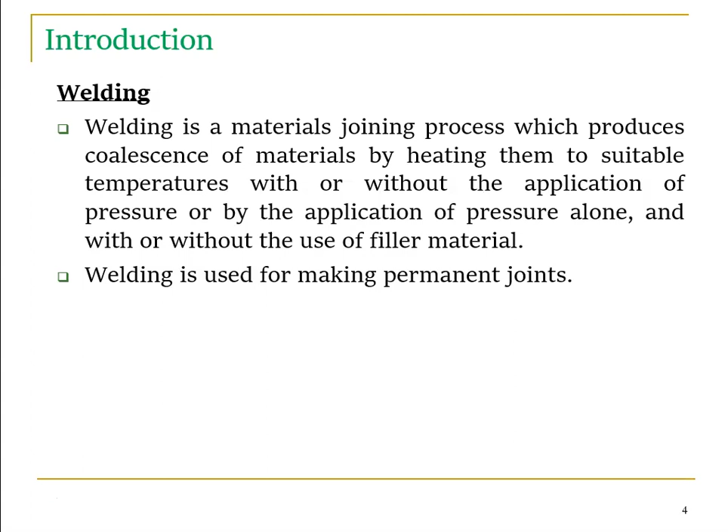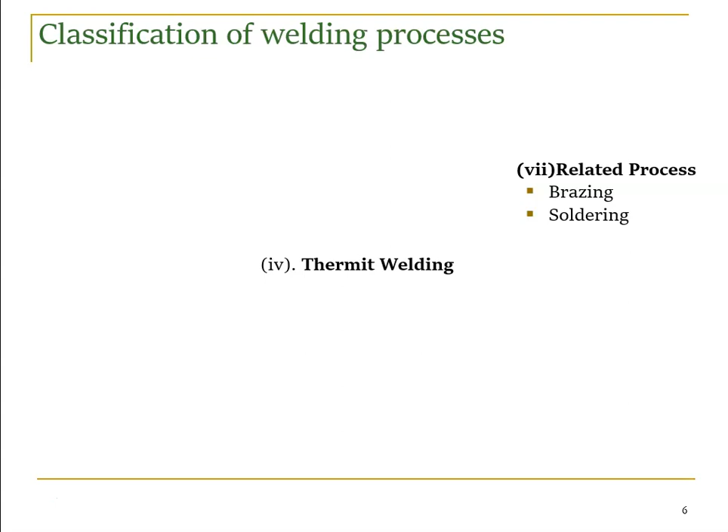So these are the classifications we have. In this video we are going to see only three things: one is thermite welding, and some related processes like brazing and soldering. So first we start with thermite welding.

Thermite welding is similar to the casting process, where in casting, I hope you know, we pour molten metal into the cavity and allow it to solidify. We will get the final shape. This is what a casting process is.

Here similarly, we are going to pour molten metal, but here the molten metal is some mixture. That mixture is allowed to solidify and we will get the joint. So if you have two pieces you are planning to join, you will create some fixtures. Those fixtures have a cavity. In that cavity you will pour some iron mixture, thermite mixture. After pouring the thermite mixture, we allow it to solidify and we will get the joint.

This is the basic principle of thermite welding. It is primarily a fusion welding process in which the weld is effected by pouring the superheated liquid thermite steel around the parts to be united.

One of the advantages of thermite welding is that it can be used in remote places, for example railway tracks. The railway track has a long length, so if some places cannot get electric source or other types of source, there you can use thermite welding to join railway tracks.

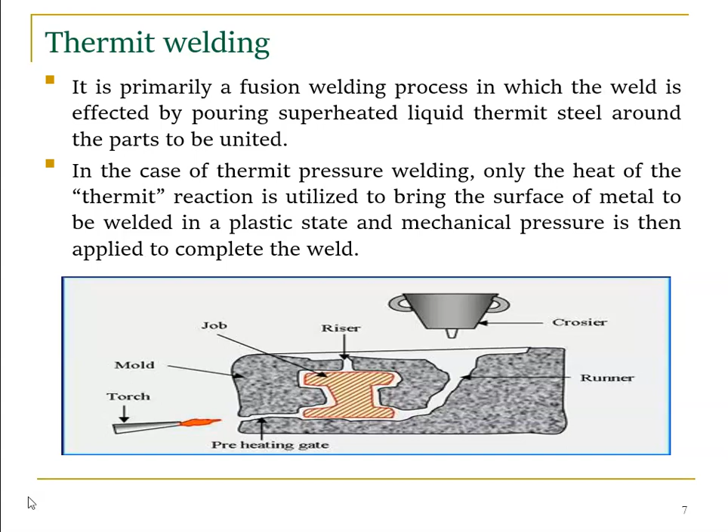So the basic principle is we pour the thermite mixture and apply some pressure to make the joint. Generally it is used for remote areas where we can't get other resources to make a joint. One example is railway tracks.

Working principle: the necessary heat for joining metal in thermite welding is obtained from the chemical reaction of metal oxide and a metal reducing agent. It is a mixture of metal oxide and metal reducing agent. Usually iron oxide is used as the metal oxide and aluminum or magnesium is used as the metal reducing agent. So we use two agents: one is the metal oxide, iron oxide, and the other is the metal reducing agent.

The strong chemical attraction of aluminum for oxygen is the basis for the thermite process. First, the thermite mixture is ignited by burning aluminum. We apply some heat and burn the aluminum. By burning the aluminum, the ignition temperature of thermite is about 1200 degrees Celsius.

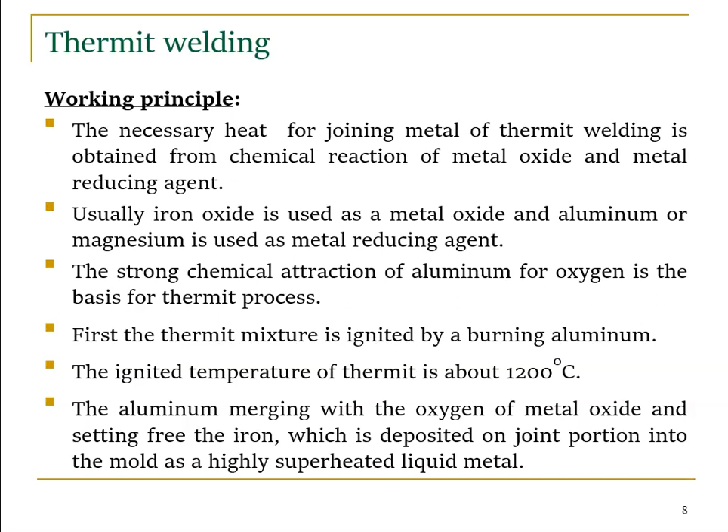The aluminum merges with the oxygen of the metal oxide, setting free the iron, which is deposited on the joint portion into the mold as a highly superheated liquid metal. So we convert that iron mixture into a highly superheated liquid metal. The theoretical temperature is about 3000 degrees Celsius for thermite, but due to the chilling effect of the crucible, the temperature is reduced to about 2500 degrees Celsius. So finally we can get a temperature of 2500 degrees Celsius.

Thermite reaction is a non-explosive process, so there is no human hazard. So how does the temperature get generated? Fe3O4 and aluminum form the thermite mixture. So we add Fe3O4 iron oxide with aluminum, and it converts to iron plus aluminum oxide, creating 719.3 kilocalories of heat.

Again, further, if we add iron oxide to aluminum, we get another 181.5 kilocalories. So these are the temperatures generated, and this heat is used to make the joint.

Applications: it has a large application in railway track repairing on the spot, because the railway track is generally placed in a remote area where we can't find other resources. It is also used in large frames like locomotive frame welding, and thermite welding is used in crankshaft welding.

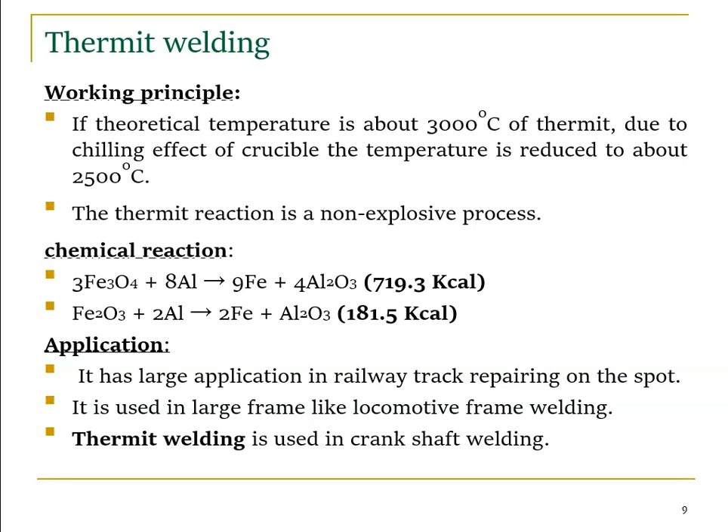Advantages are: the heat necessary for welding is obtained from the chemical reaction, so we don't need any costly power supply or equipment, and on-site welding is possible. One of the limitations is that it is applicable only for ferrous metals, and the process is uneconomical if used to weld cheap metals or light parts.

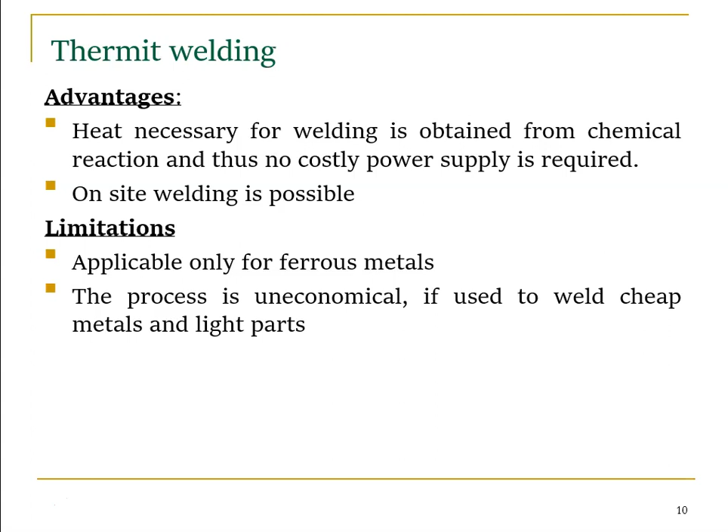If you are planning to join cheap metals or uneconomical metals, then it is not the best way, because it is somewhat economical if you use it for iron or other materials, right?

The next process is a related one: soldering. Soldering is generally used for electronic components. Solder joint is the process of joining two or more pieces of metal by means of a fusible alloy or metal called solder, used as the filler metal. In the solder joint, the filler metal is spread throughout the properly fitted joint surface by capillary attraction forces, usually where heat is applied.

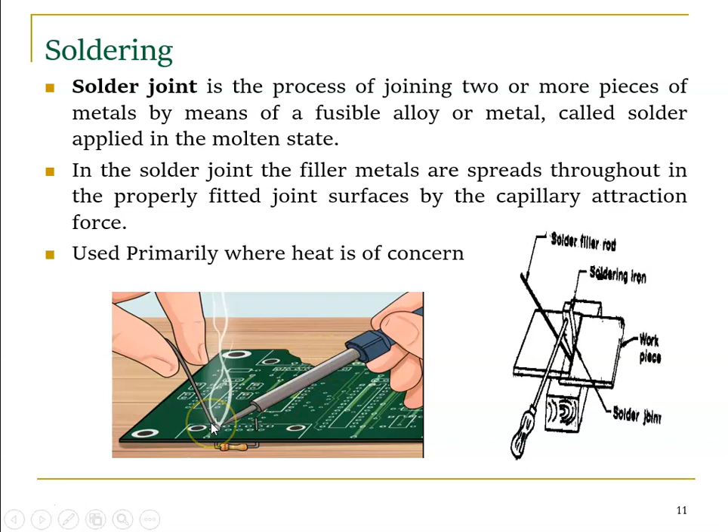This is one example of soldering. If you are planning to join electronic components, we use solder, one of the filler metals, along with a soldering filler rod and an iron piece. If you supply electricity, the solder gets deposited on top of the base metals being welded.

The selection of soldering flux depends on the type of solder used, the type of base metal, and its degree of surface cleanliness. After completion of the soldering process, the flux residue should be removable. These are some of the selection criteria for flux.

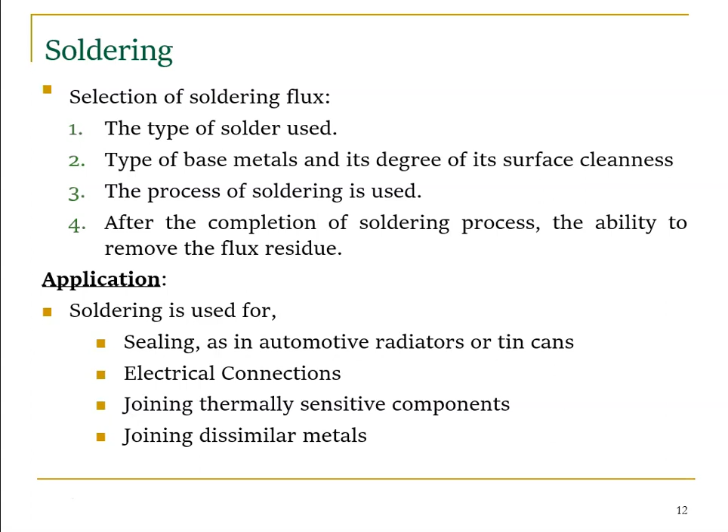Applications include sealing in automotive radiators or tin cans, electrical connections, joining thermally sensitive components, and joining dissimilar metals. These are some of the applications.

Advantages: a wide variety of materials can be soldered, different sizes can be soldered, but generally we use it for small joints. It allows bonding over an entire surface with flexible adhesives, since the filler metal acts as the bonding agent deposited across the surface. It also has low temperature curing and simple joint design.

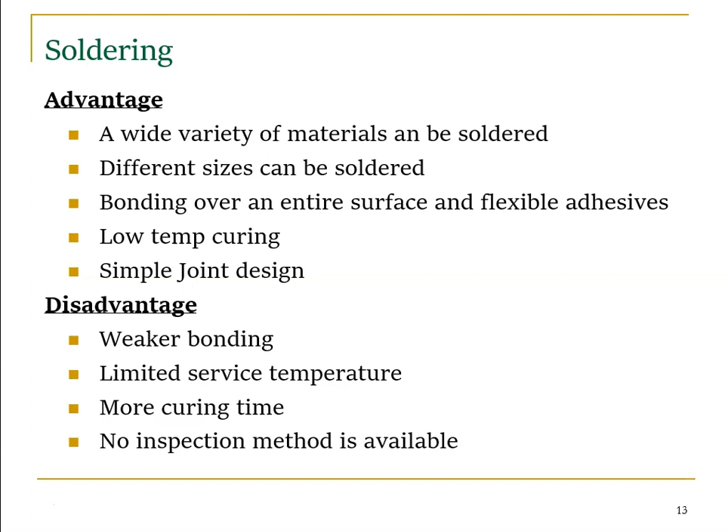Limitations are weaker bonding, limited service temperature, more curing time, and no inspection method is available, so you cannot ensure whether the metal pieces are properly joined. If you try to test it, it may come apart because it has weaker bonding.

The next process is brazing. It is similar to soldering, the only difference being the temperature and the filler metal. Brazing is a joining method wherein coalescence is produced by heating to a suitable temperature and adding a filler metal, with the temperature above 427 degrees Celsius but below the solidus temperature of the base metal. The base metal is not melted.

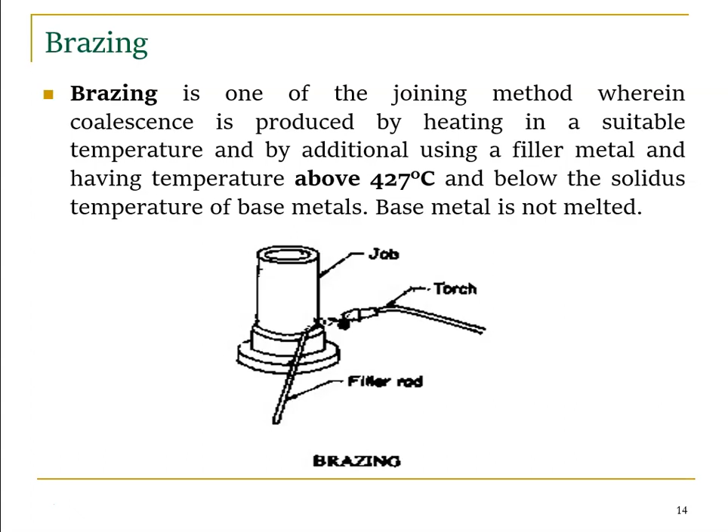In the brazing process, the metallic parts are joined by a non-ferrous filler metal or alloy. The filler metal is distributed through the closely fitted mating parts and joined by capillary action. Brazing is a semi-permanent joint, whereas welding is a permanent joint, since brazing has a weaker bonding.

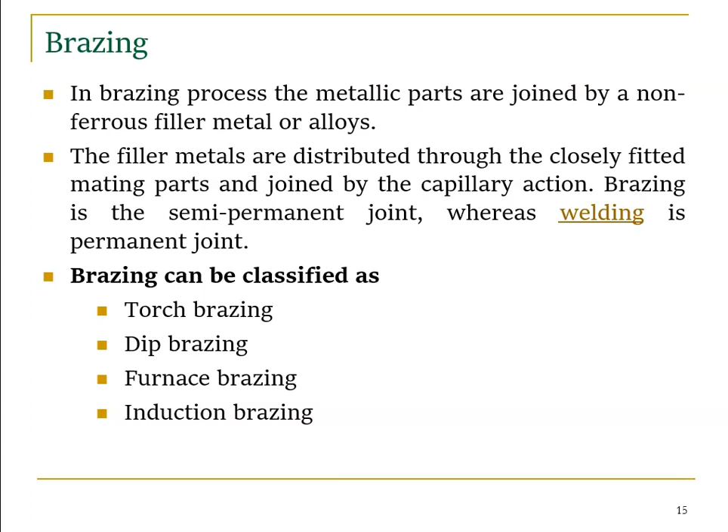Brazing can be classified based on method: torch brazing, dip brazing, furnace brazing, induction brazing. The filler metal, braze, is generally available as a rod, ribbon, powder, paste, cream, or wire, etc. Materials such as aluminium, silicon, copper, copper-phosphorus, and copper-zinc are some of the filler metals used.

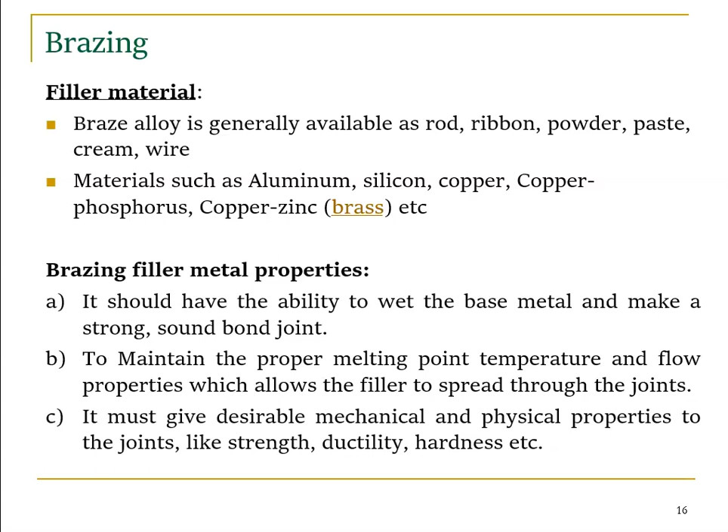Brazing filler metal properties: it should have the ability to wet the base metal and make a strong, sound bonded joint, maintain the proper melting point temperature and flow properties which allow the filler to spread through the joint, and it must give desirable mechanical and physical properties to the joint like strength, ductility, hardness, etc.

So how do we braze? First, prepare the braze workpiece by cleaning the joint portion and also cleaning the filler metal surface, doing some surface preparation. Then provide flux to both the base metal joint portion and the filler metal surface, applied in order to avoid oxidation.

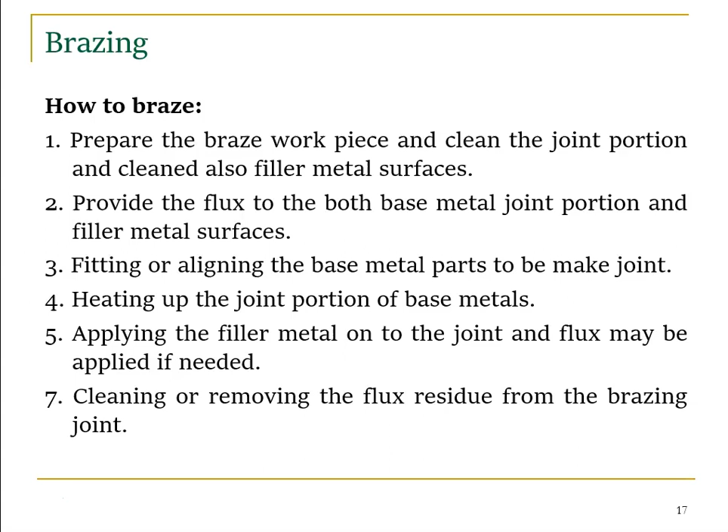Next, fit or align the base metal parts to make the joint, aligning the filler metal where brazing is needed. Then heat the joint portion of the base metal, apply the filler metal onto the joint, applying flux again if needed, and finally clean or remove the flux residue from the brazed joint. These are the steps of the brazing process.

Advantages: gas entrapment is very minimal because the filler metal melts properly and spreads throughout the surface, making a pressure-tight joint. Brazing joints can be carried out on a large number of dissimilar materials, smooth or scaleless surfaces can be obtained, the joints possess good strength at increased temperatures, and thin-walled or light gauge sheets can be easily joined by brazing, which cannot be joined by welding.

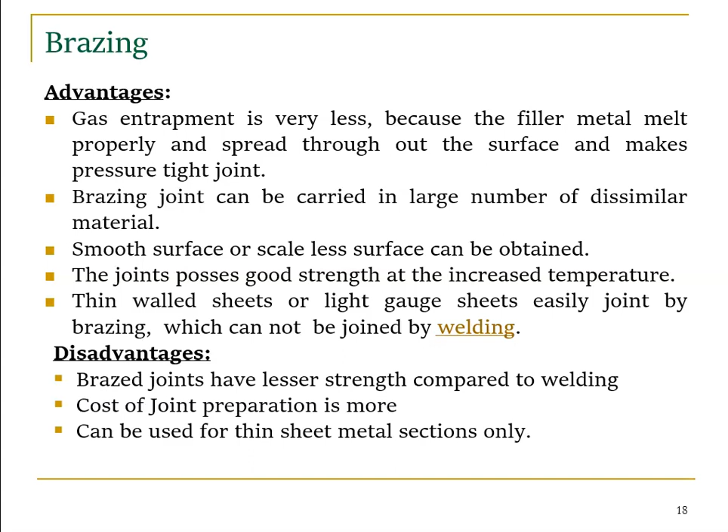Limitations or disadvantages: brazed joints have lesser strength compared to welding because it is a semi-permanent joint. Cost of joint preparation is higher because we need to prepare the surface, so the involved cost is high. It can also be used for thin sheet metal sections only.

Okay, thank you. This is the final presentation of the metal joining process.